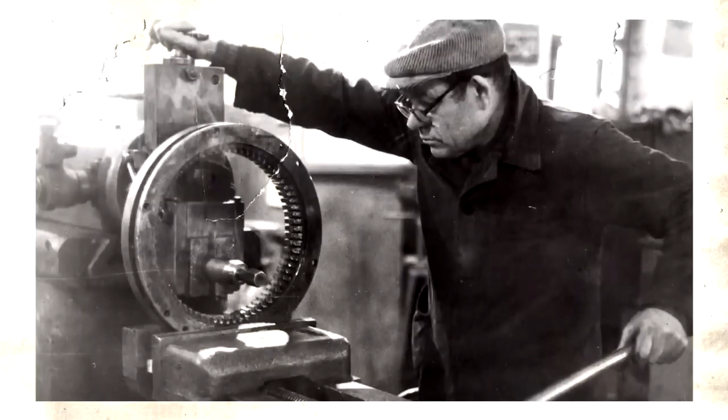The outstanding Soviet physicist and inventor Lev Alexandrovich Yutkin was born on August 5, 1911 in the city of Belozersk, Vologda region. He entered university only in 1930, after 2 years of mandatory work at a factory as a turner due to his class unreliability.

In his 4th year at the university in 1933, Lev Yutkin achieved his first significant results in the field of the electrohydraulic effect. Soon after his discovery, in 1933, he was imprisoned under Article 58 for treason against the motherland. The accusation was absurd - they claimed he tried to blow up a bridge using his electrohydraulic discharge.

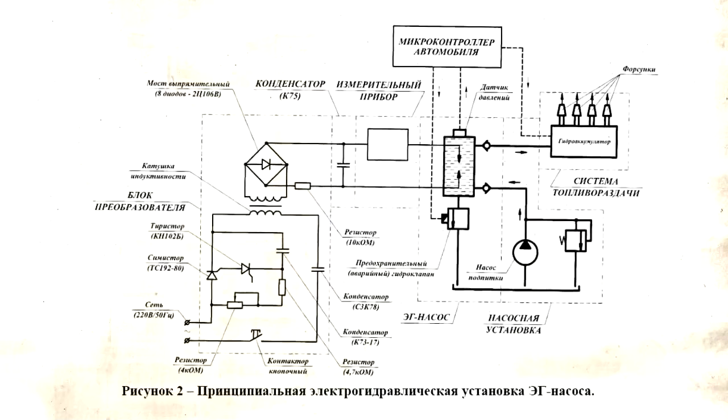There was an opinion that Yutkin invented his EH effect only in 1950, since it was in that year that the effect was patented. But that's not actually the case - he conducted and completed most research on the electrohydraulic effect in the 1930s, and according to him, he developed the complete theory of the electrohydraulic effect as early as 1938.

The electrohydraulic effect, as described by Yutkin, is a powerful hydraulic shock with local pressure exceeding 100,000 atmospheres, which occurs when a high voltage spark discharge passes through a water gap. In fact, it explodes the water.

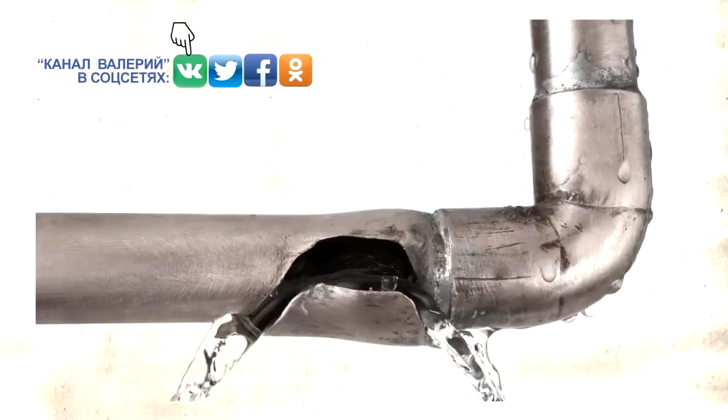That's why people commonly call this effect simply a hydraulic shock. Although, to be fair, the scientific meaning of hydraulic shock is quite different from this phenomenon and has nothing to do with Yutkin's effect.

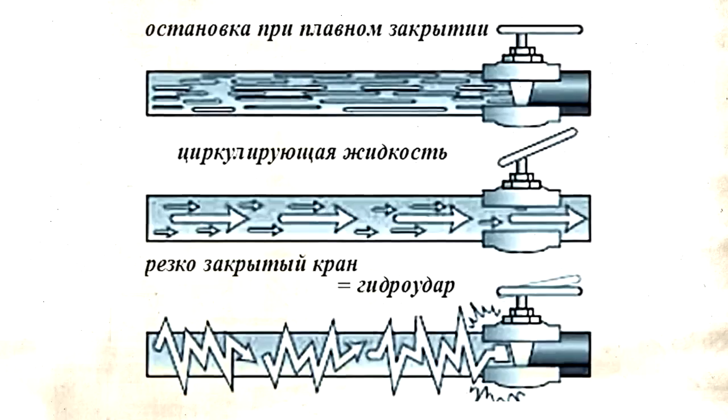To produce such an electrohydraulic shock, alternating current from the mains is supplied to a step-up transformer, where the voltage is increased to several kilovolts. Then the electric current is rectified by diodes and sent to a capacitor, where the voltage accumulates to the required value.

After that, a high voltage breakdown occurs between the electrodes placed in the water when a certain value is reached, which generates the electrohydraulic shock, manifested as a loud bang, with a local increase in pressure of several tens of thousands of atmospheres.

I would also add my own question: where does this energy come from? What is actually exploding there?

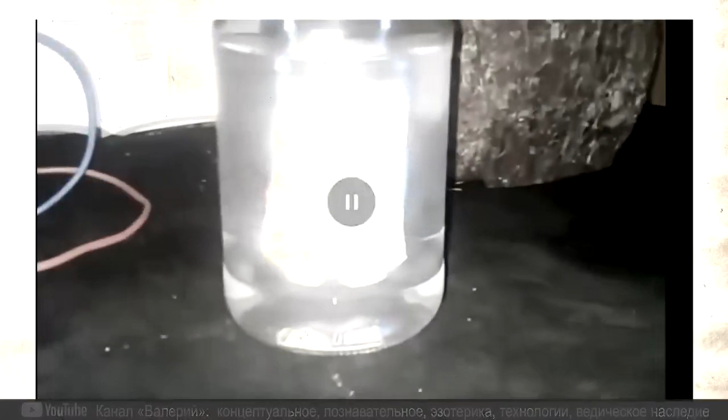By using a high-powered electric charge, electrolysis of water occurs, breaking it down into its components, hydrogen and oxygen. This explosive mixture ends up in a water bubble, which immediately explodes, and as we know, water is almost impossible to compress - that's where such enormous pressure is created. It turns out that the energy of the explosion comes from the decomposition of the water itself.

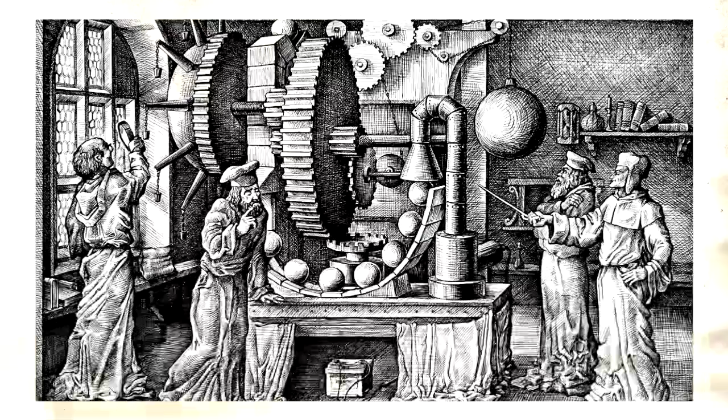In fact, anyone can assemble such a device at home. In fact, this is the invention of a perpetual motion machine, as long as there is water, which is why this invention is being kept quiet.

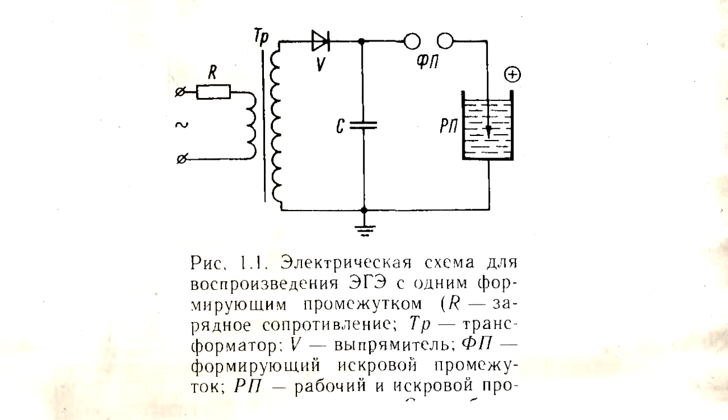In the diagram, there is an electrical circuit for reproducing an electrohydraulic shock with a single forming gap. R is the charging resistor, T is the transformer, V is the rectifier, FP is the forming spark gap, RP is the working spark gap in the liquid, and C is the working capacitance capacitor.

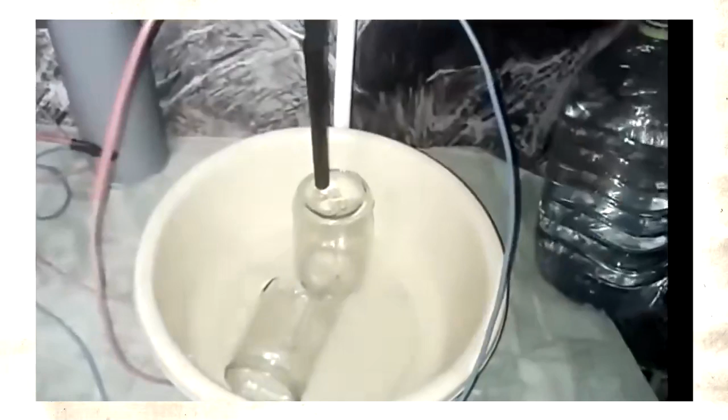One of the most significant practical values and advantages of this effect is its 100% repeatability and the simplicity of implementation, even at home, without the use of expensive laboratory equipment and materials.

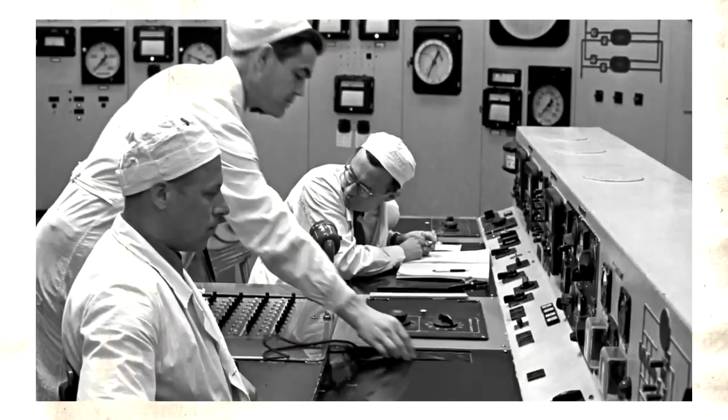The author himself has repeatedly upgraded and improved his designs. For example, the same basic circuit was eventually implemented using 2 spark gaps. According to its creator, this greatly increased the steepness of the pulse fronts and made the circuit much more efficient and easier to tune - the electrical circuit for reproducing the effect with 2 shaping gaps.

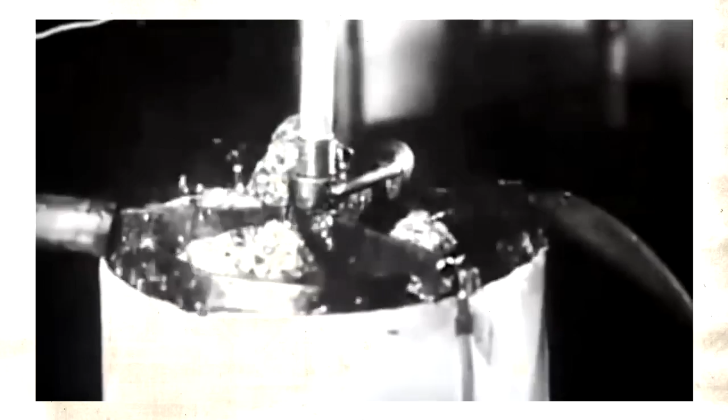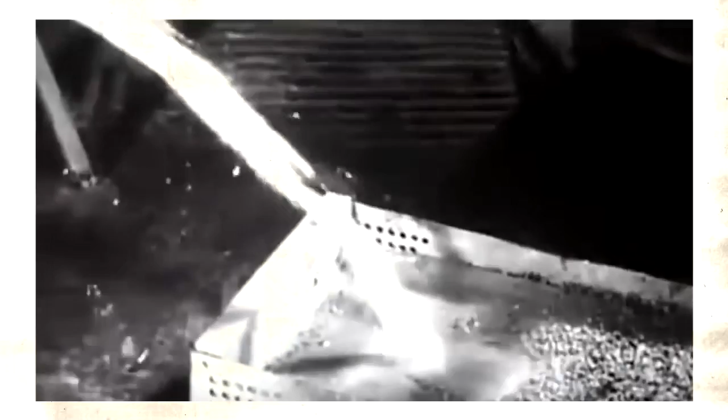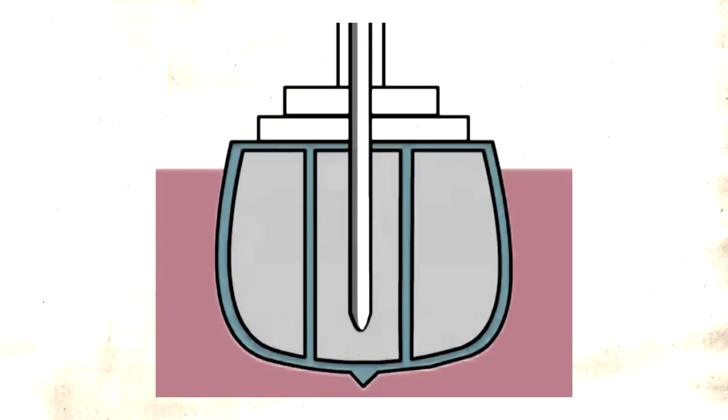This property can be used for crushing and grinding rock, metal pressing and stamping, as well as for converting into other types of mechanical energy, for example into torque, by using crank and connecting rod mechanisms. A special design that could actually replace today's gasoline engine.

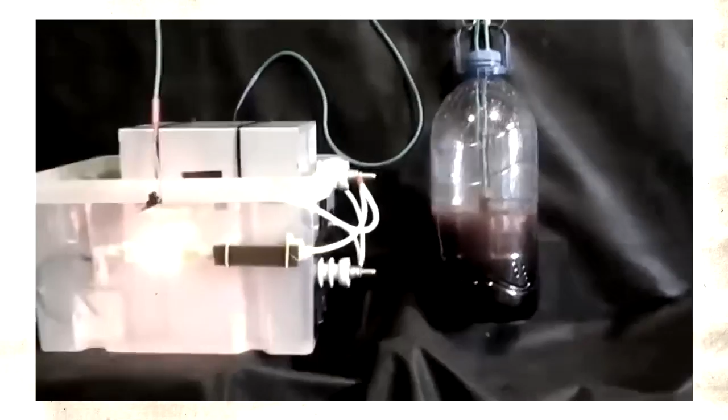Local temperature increase: according to the author and independent researchers of this effect, when the Yutkin effect is present, the temperature of the liquid rises incomparably faster than the amount of electrical energy spent to create this effect. This makes it possible to build highly efficient heating devices based on this effect. This heating property appears together with the above-mentioned property of local pressure increase, which makes it reasonable to use both of these properties at the same time.

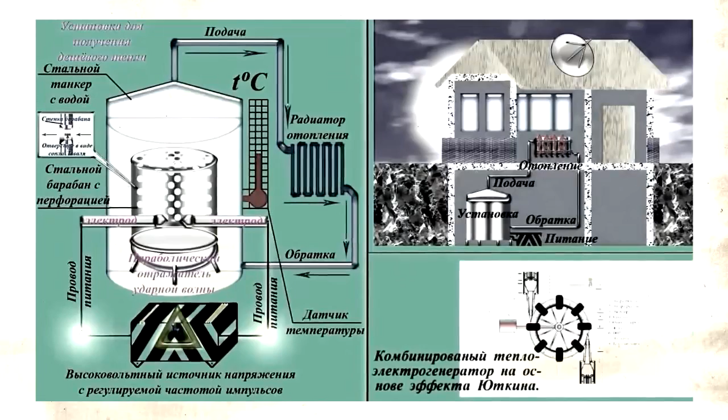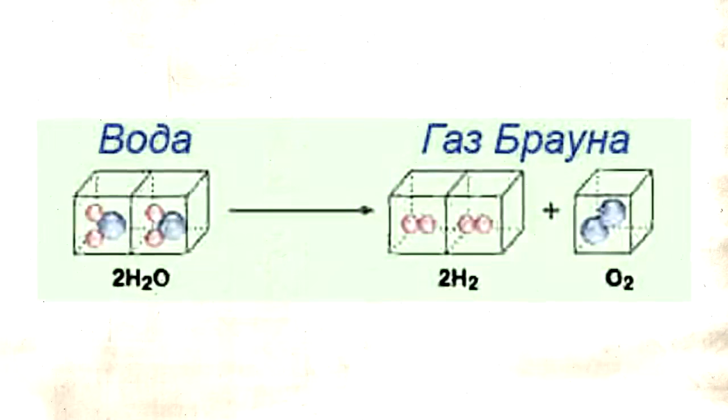Extraction of Brown's gas from water. Since this property was not discovered by the author himself but by his later followers, it is not as well studied, especially its quantitative aspect. How efficient is extracting this gas? Brown's gas is already a mix of hydrogen and oxygen. But in any case, it would be a useful addition to the two effects obtained. In fact, with one microexplosion, we get three effects at once.

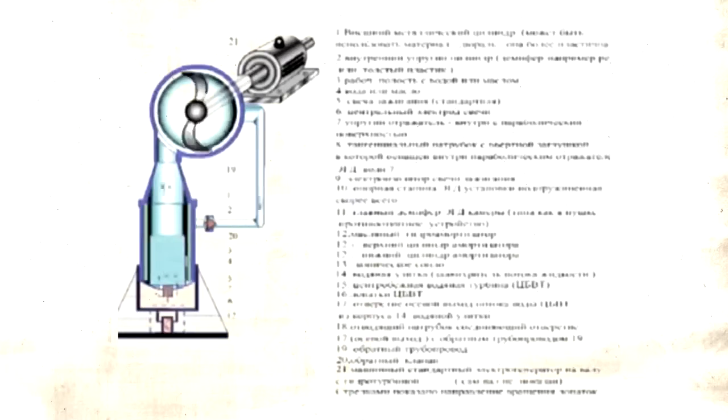This development was stopped due to significant detonation. In fact, such a hydraulic shock stuns the fish. Of course, they could have come up with a muffler, just like with regular engines, but apparently they decided not to pursue this topic further.

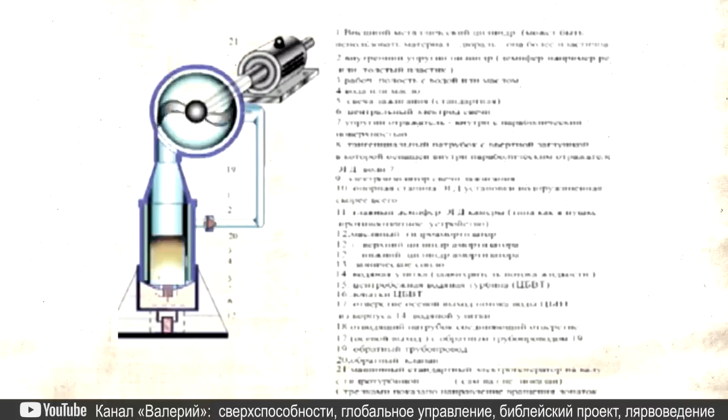Here we need to understand, by producing such engines, the government was essentially releasing a fuel-free perpetual motion generator, which global management simply could not allow.

Yutkin's effect opened up incredible possibilities in various fields. In the experiments, the impulse power of the strike reached 100 megawatts, which is comparable to the output of a solid power plant. In front of the shock wave, the pressure rises up to 30,000 atmospheres.

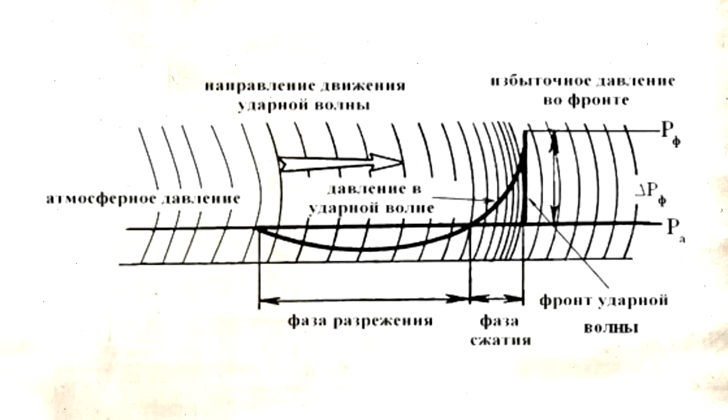During the impulse discharge, emissions such as X-rays in the ionizing range, acoustic waves, electromagnetic fields, and high-speed fluid flows occur. And finally, cavitation, which occurs when the discharge zone collapses.

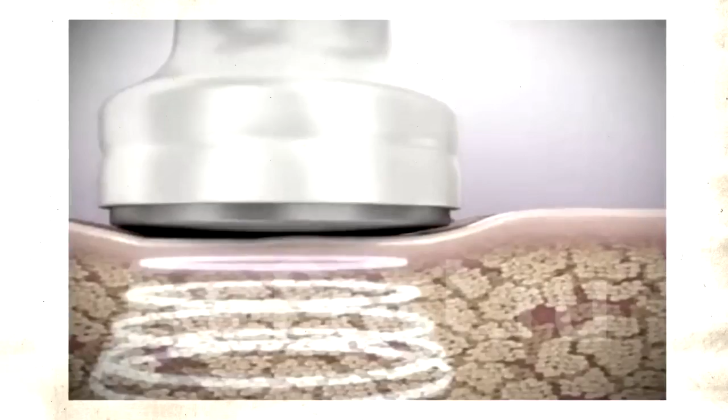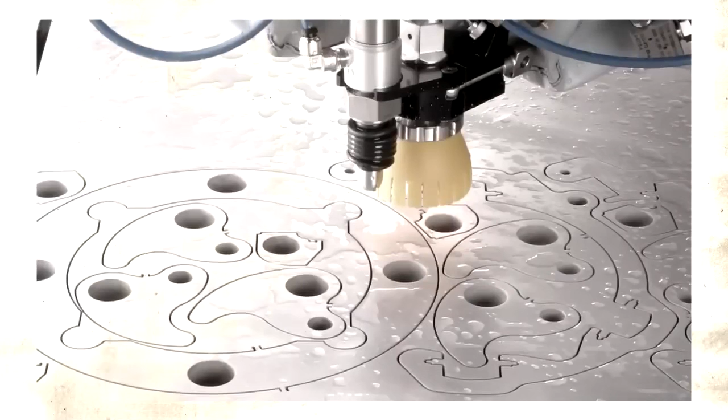The beauty of breaking stones using this method is that the consumption of materials and electricity for this process is minimal. Moreover, with this effect, a stone block can be cut like with a laser, and when combined with electronic technologies, nowadays you could practically work wonders with stone.

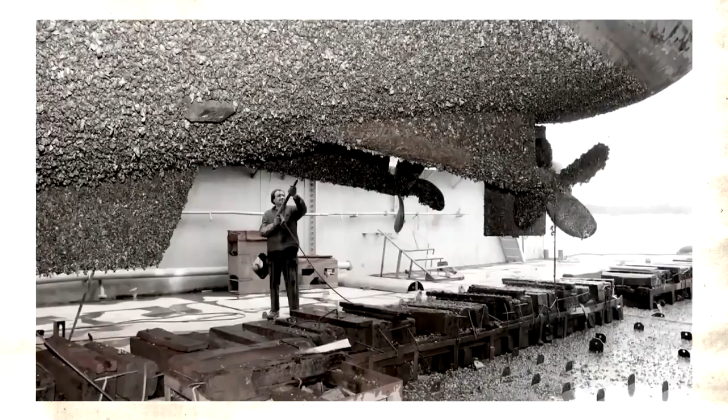This effect lets you clean a ship's bottom. No radical methods against fouling on ships have been found so far, and this method would be ideal.

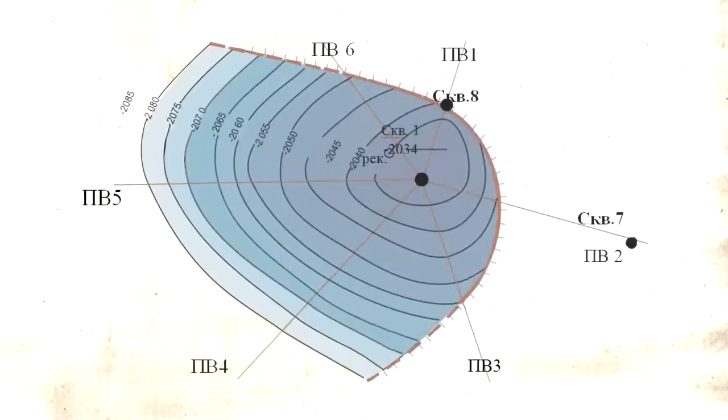Methods for creating stable mixtures from substances that usually do not mix: water, kerosene, alcohol, gasoline, and most importantly, all of this is very economical.

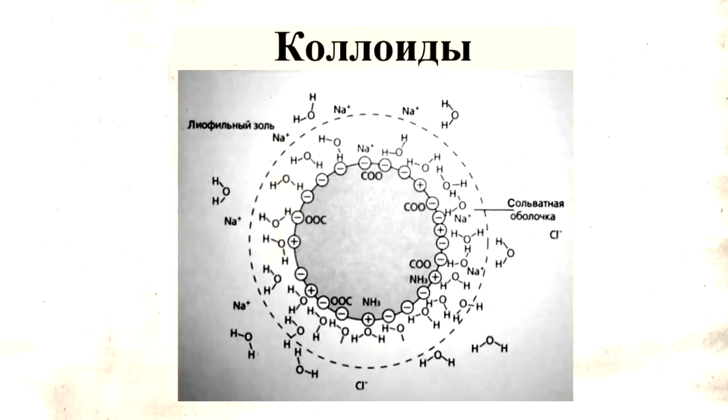Besides mechanical effects, the process alters water's chemical composition and greatly increases the solubility of elements and compounds. Up to 95% of metal compounds dissolve into the water, forming colloids. This opens up even more exciting areas of application.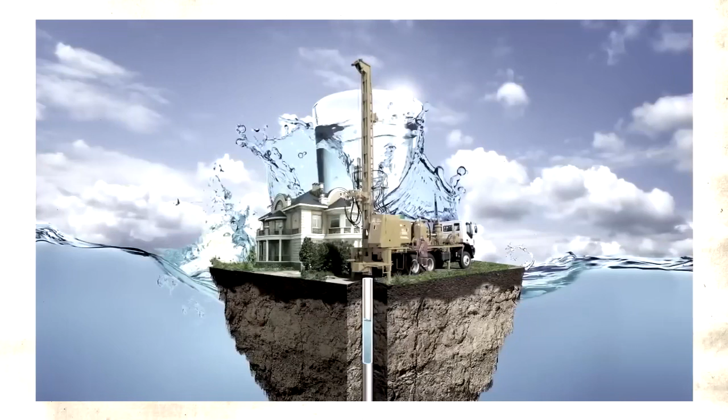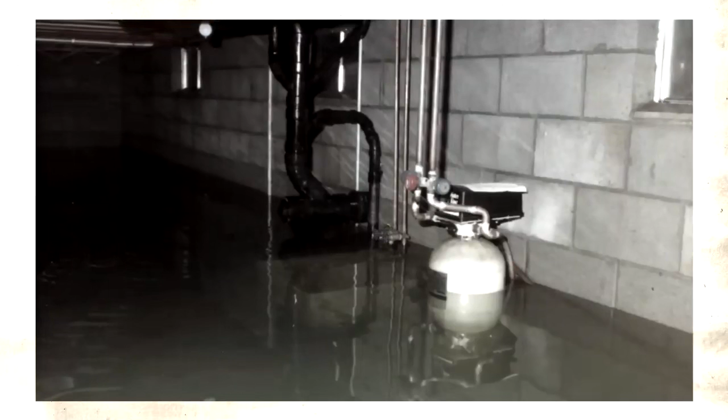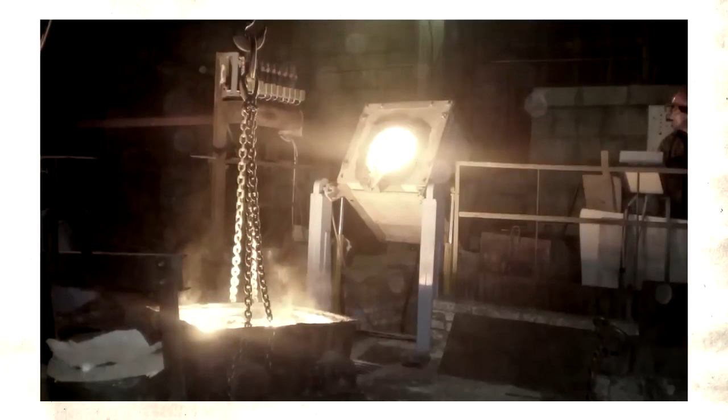And all this is done without any smelting furnaces with their vegetation-killing emissions. For a version of the scale at which our ancestors extracted minerals in this way, watch the video on the channel Mountains Were Poured from Waste of Pasty Thickening of Rocks on a Planetary Scale.

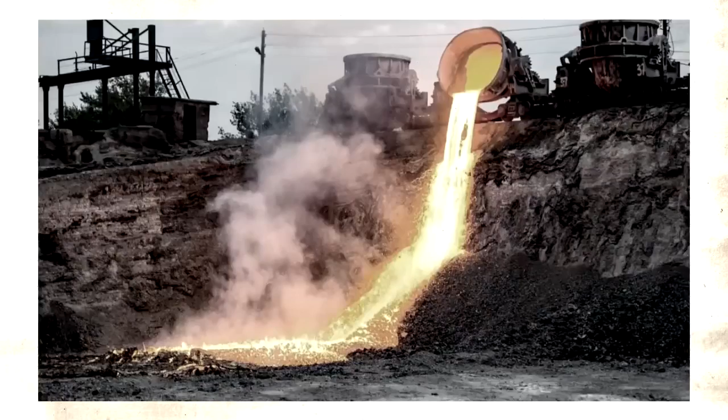Furthermore, electrohydraulic processing of metallurgical slag not only allows for the extraction of the remaining metal, but also turns the slag itself into raw material for cement production or into fertilizers. And here we move on to the second, which became the main area of Yutkin's work.

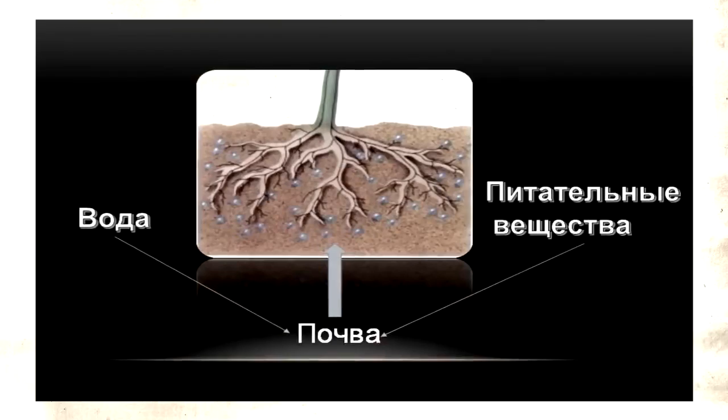In principle, the soil contains enough nutrients to last for hundreds of years, but for the most part they are in a form that is unavailable for absorption, as they are bound. Yutkin aimed to harness the soil's vast potential, and his method fundamentally transforms agricultural technology.

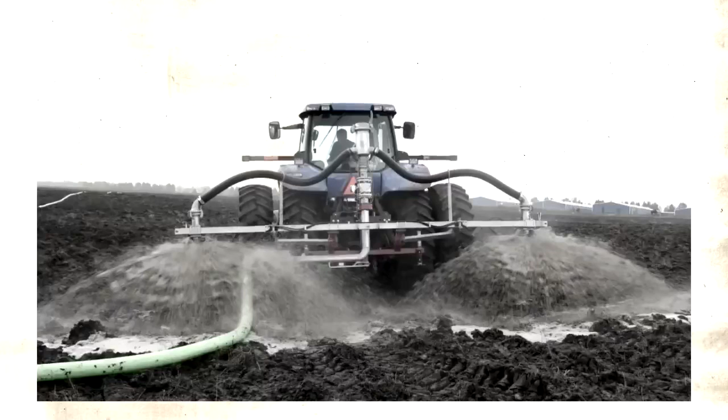Imagine a tractor moving across the field with a water tank, occasionally scooping up a few handfuls of soil with a small bucket and spraying or pouring the pulp into the furrow. Electrohydraulic treatment converts potassium and phosphorus fertilizers, as well as about 30 other essential trace elements, into a solution available for plant absorption. At the same time, one handful of soil per square meter is quite enough for a whole year.

The water used in the pulp isn't ordinary. Thanks to electrohydraulic treatment, the nitrogen contained in the air dissolved in the water, 78% nitrogen, turns into nitrogen fertilizers directly from the air. Nitrogen combined with hydrogen and oxygen totals about 600 grams per ton of water. Yutkin called this fertilizer-free fertilizer.

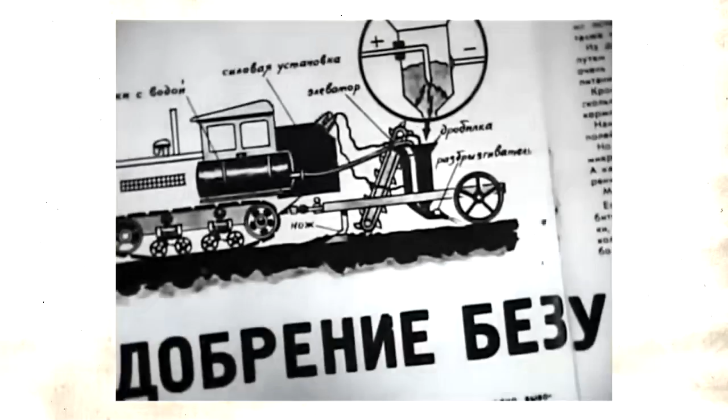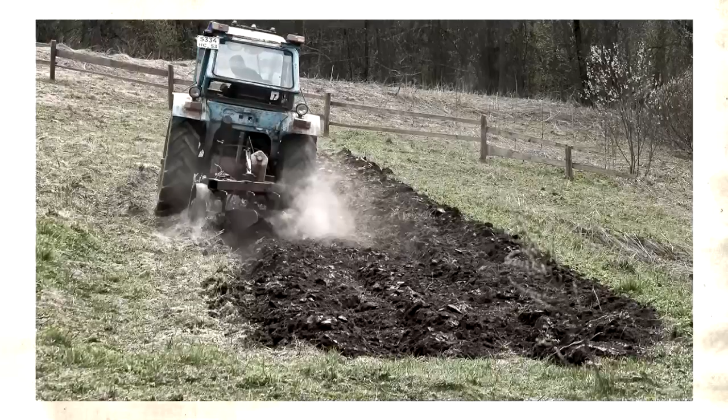In fact, you can also treat river water using the electrohydraulic method, which usually contains soil in the form of silt. In a more complex version, such a tractor can simultaneously perform plowing and sowing, and as a result we get the desired one-pass farming system. The revolutionary and environmentally important aspect of this engineering solution is also that there is no longer any need for quarries and dusty factories producing fertilizers, and the need for their mass transportation is completely eliminated.

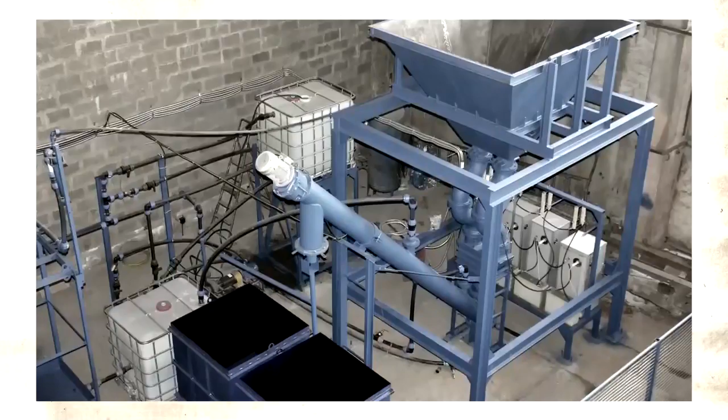This allows liquid fertilizers, the most advanced type, to be produced directly on a peat field at the individual farm level using a low-cost standard unit with up to 200 kilowatts of capacity. Calculations show that, thanks to increased crop yields, the cost of the unit will pay for itself more than 10 times over in just 1 year.

The use of electrohydraulically treated peat for seed yeast treatment also makes this method more rational, making it both more economical and more effective at the same time. There are also groups of engineering solutions for land reclamation, for example, methods for reducing the drainage of sandy soils and increasing the drainage of clay soils.

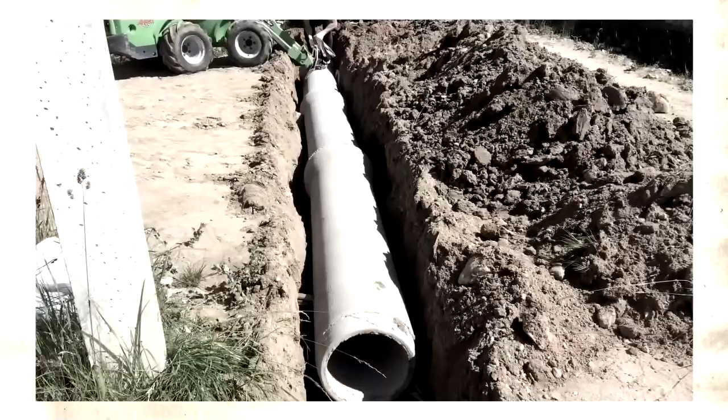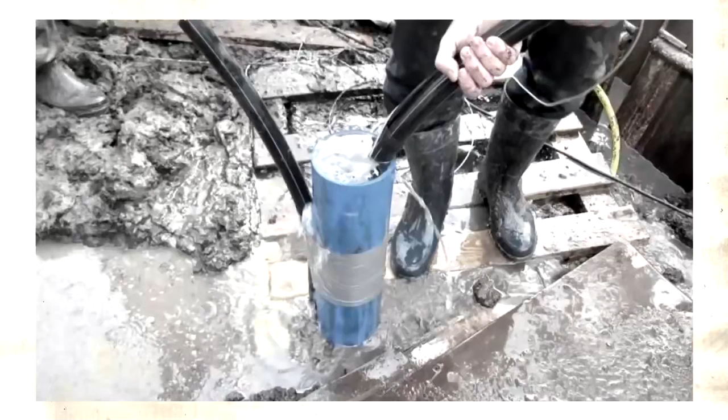A trenchless underground laying method, and at the speed of a tractor. Concrete pipes, which with certain technological variations to make them porous, can serve as a drainage network. A method for cleaning water intake well filters, increasing the well yield by 2.5 to 18 times. There are also electrohydraulic methods for turning coarse feed like straw into full value feed.

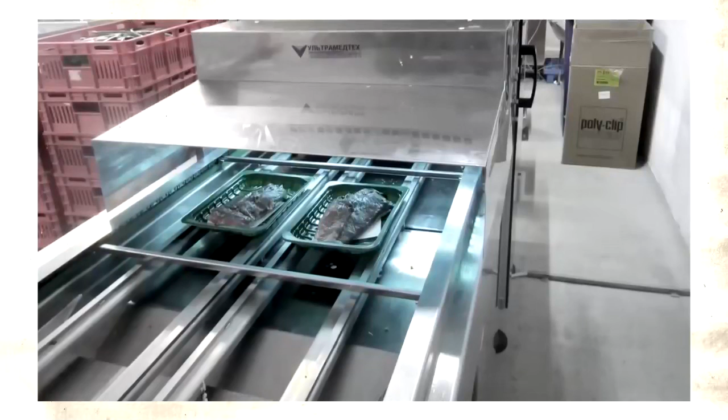Disinfection of manure, destruction of helminth eggs that can withstand even 20,000 Roentgens of radiation but are completely destroyed by an electrohydraulic shock. Disinfection, sterilization of various kinds of products, ensuring both their long-term storage and safe consumption.

Therefore, based on patent documents, around 1,000 engineering solutions have emerged from the phenomenon of liquid discharge. And this is what we read in the magazine Tekhnika Molodezhi from 1982. Using the example of such Yutkin effects, we can see how rational it would be to use the Earth's resources without destroying nature, but on the contrary, by replenishing its resources.